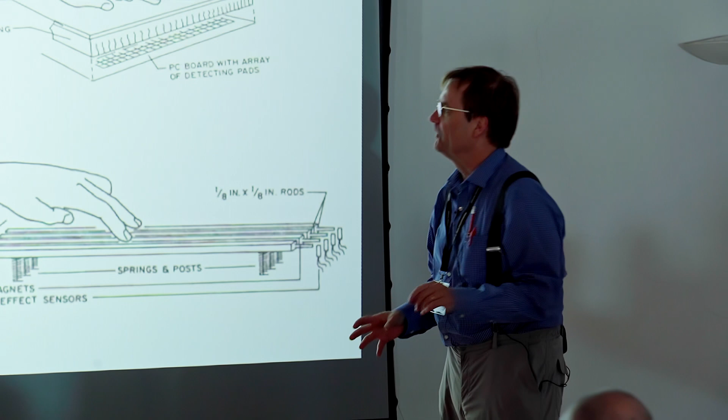Yeah, please. If you look at Osmose and how fast it developed, I know 5 years is a long time to wait nowadays, but boy, I look back. In 37 BOE, I had a working system of sorts with

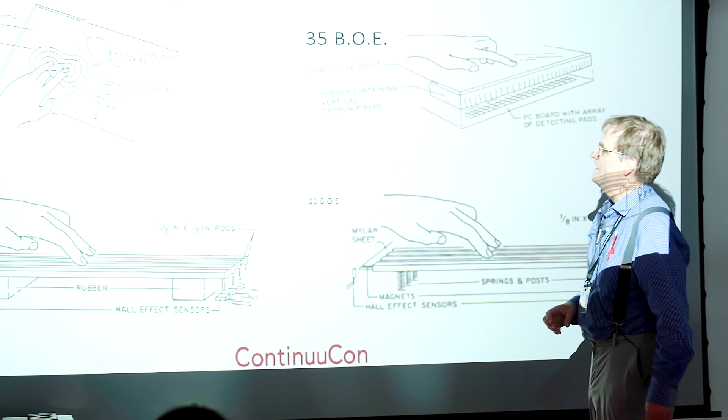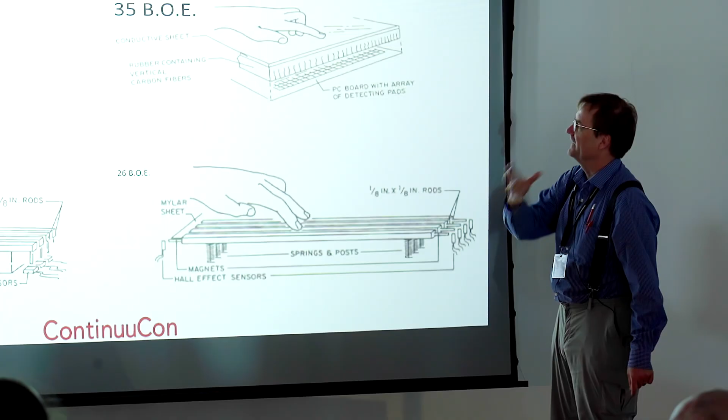photoelastics, its own ball of wax. Then after I gave up on that, mostly because 2D image processing was very difficult, and the plastic kept melting because the camera needed too bright a light, we went to having rubber with impregnated carbon so that it conducts in one direction. And then a whole field of sensors, and it was the best thing I ever built.

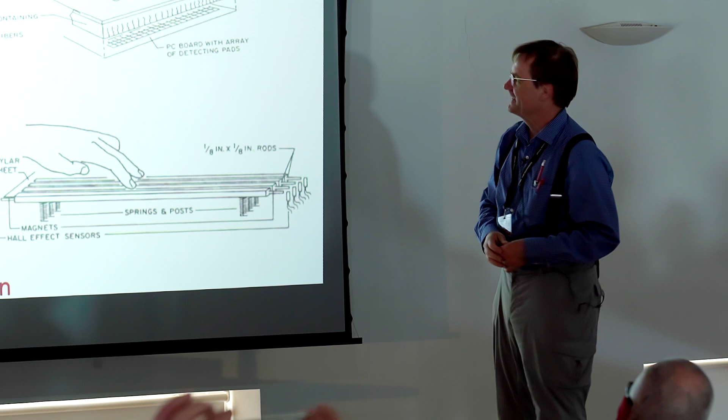Lasts about a half hour for a sheet, and then the carbon breaks down, and then it's not the best thing anymore. And then many years later,

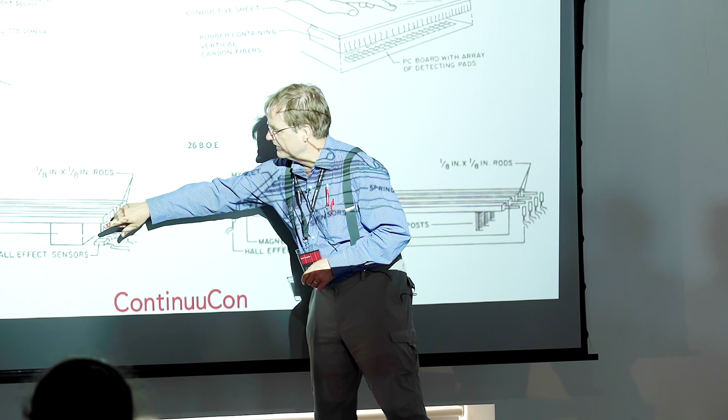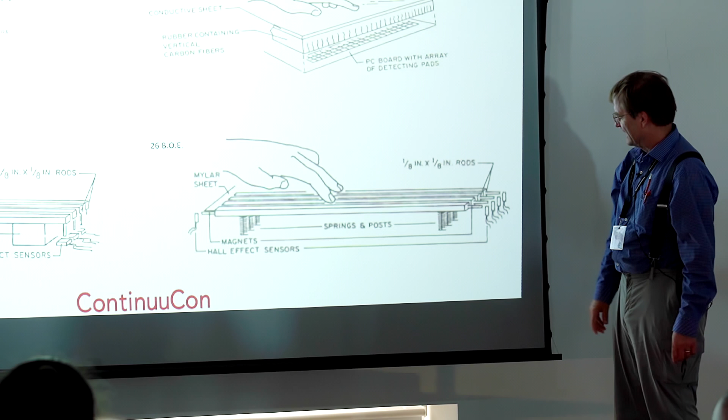actually had rods that were square at first. They would, as you slid, sweep out a pattern over the magnets. There's still a lot of interaction, but we did figure out that, hey, if we actually axially mount them, that's good. The Hall effect sensors moved back down there. But anyway, we went through many different things.

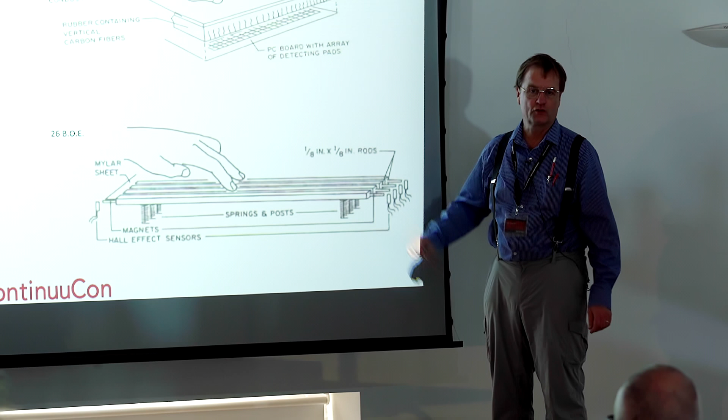But 26 BOE, we had basically what we have now. And all that tells you is, I don't know a nice word to say this, but this was not enjoyable to play by today's standards. And everything is in the details.

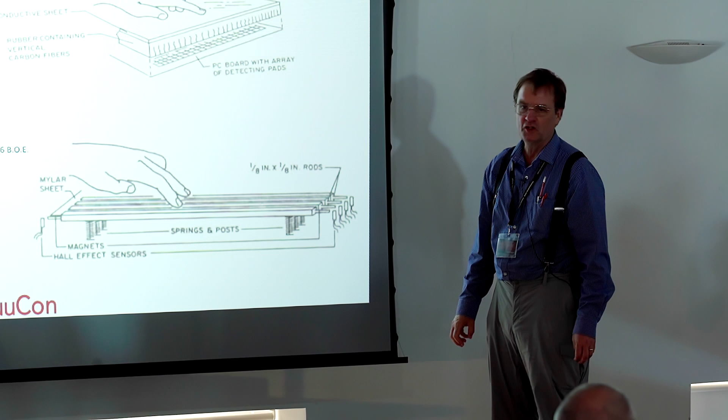The big thing that's, you can go on for your side. The big change with the Osmose is that not only did Ed really bring a cool engineering project to a real instrument, and that whole evolution, but now this EaganMatrix that was incubated in the Continuum goes to something that really is of interest

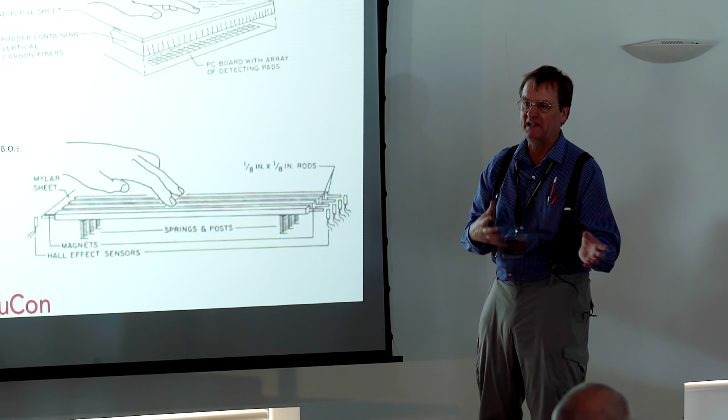for mass consumption. And that's huge for me as an engineer. I'm very proud of the Continuum. But I also realize, like, everybody wants a keyboard, and a Continuum is nice, but most people want to inherit the playing technique they have. Most people want more use for the equipment they already have and have it play nice with that. Lots of reasons to have a keyboard, since keyboard is by far the dominant thing.

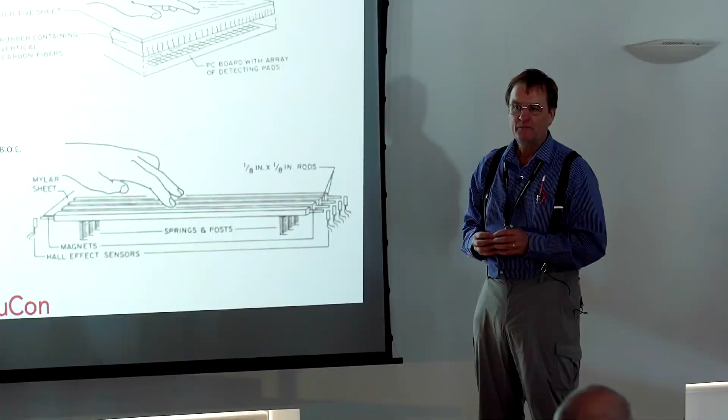So I'm very excited about the marriage of the two, because as an engineer, unlike an artist - art doesn't get better or worse if there's mass consumption - but for an engineer, if your stuff goes out and dies, then, well, that's not good engineering by definition. And no matter how pretty your bridge is, if it collapses, it's not good engineering.

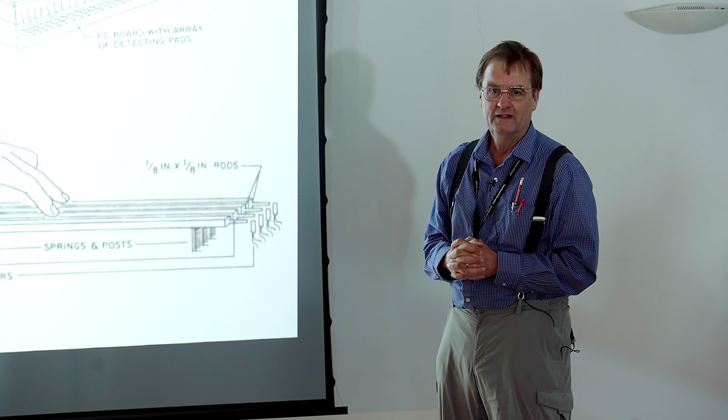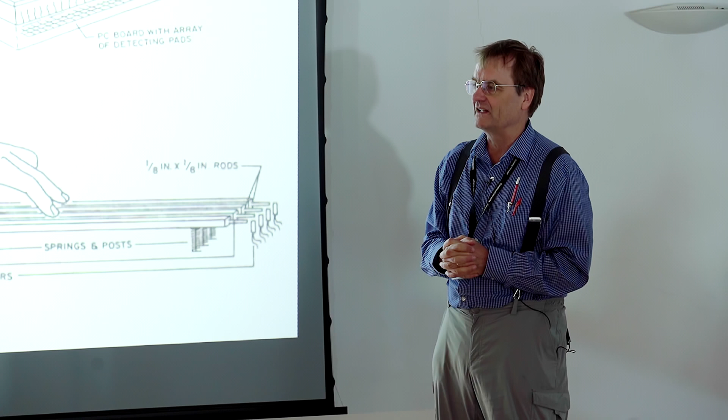So it's not there yet. You know, everything takes time, especially a real instrument as opposed to a flash in the pan device like we're used to. But I have high hopes. So I'm going to turn it over to Guillaume, and yeah. Oh yeah.

Yeah, so I'm Guillaume from Expressive. So before making the Osmose instrument, we first made our first controller, called Touché.

All this project came from research at the University of Pierre and Marie Curie in France, and the goal was to find the same kind of interaction as the touché part of the Ondes Martenot, because this mechanical system was a bit lost over time. The idea was to find another manner to achieve the same kind of interaction, because on the haptic side, the mechanical feedback was really interesting.

So you bring the volume directly with one hand and have the pitch with the other, and you can be really expressive. With the Ondes Martenot, there are some pieces that could be played with different normal orchestral instruments.